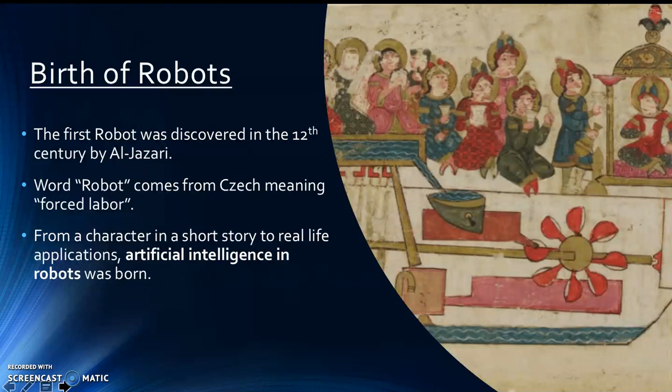These robots became more and more sophisticated so that they can run the full automation of factories. In this technologically advanced era, every operation in an advanced factory, from the very starting point of the product design till the assembly and inspection, is controlled by intelligent systems consisting of computers and industrial robots.

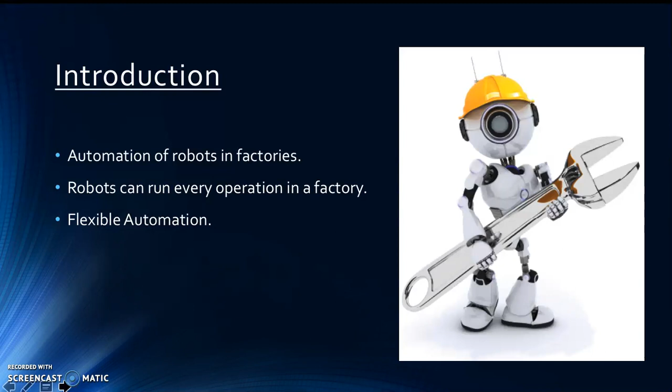An important keyword in this transformation is flexibility. Robotics became more and more flexible due to the progress in computer technology and programming techniques.

Open manufacturing. Advanced robotics are used in many industries to accelerate manufacturing processes such as transporting and handling of materials, welding, dispensing, and many more technical tasks. Automation is a branch of open manufacturing which decreases operating costs, increasing efficiency and quality of work in a factory.

More modern companies engage in open manufacturing, which is a modernized method of production where products are created in an open, collaborative, and distributive manner. This allows for a broader design scope and product capability, which in turn adds value to products.

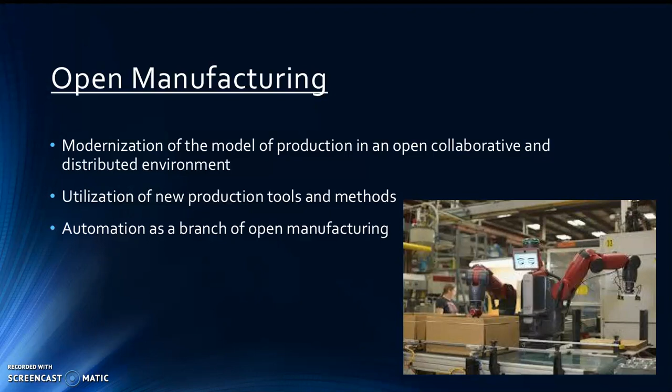Open manufacturing utilizes new production tools, methods, and networking techniques to make the production process more engaging and open to modern manipulations. The demand for a permanent change in production lines of industrial robot makes industrial automation desirable.

Flexible automations of industrial robots enables them to adapt to different tasks while decreasing the time needed for product manufacturing while maintaining a high quality of work.

An example of a state-of-the-art flexible automation production line is the Tesla Motors factory in Fremont, California. Robots have essentially replaced the need for human intervention and can perform generalized as well as specialized tasks.

The key feature of flexible automation is that by being able to adapt and retask whenever necessary, it makes it possible to keep production costs at a fixed rate, whether a small batch or a large quantity of parts are being produced.

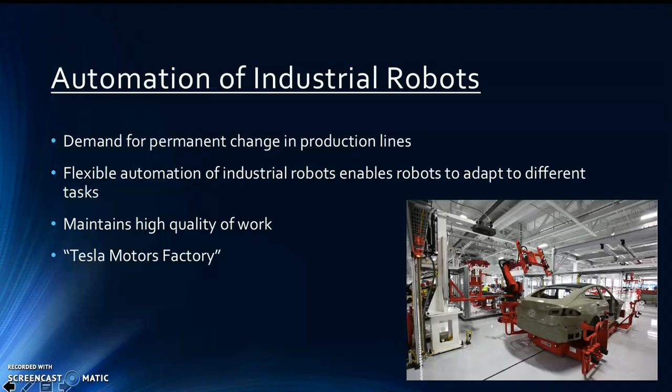Artificial intelligence is commonly attributed to intelligence displayed by man-made machines. With artificial intelligence being implemented into robotics, a new generation of control machine that is able to operate either autonomously or with human supervision is created.

Previously, robots were programmed to perform a certain task or set number of tasks. However, with the interconnection between mechanical, electrical, and computational requirements for modern machines, it is possible to create robots that are able to receive stimulation from external sensors and make decisions based on learning and reasoning algorithms.

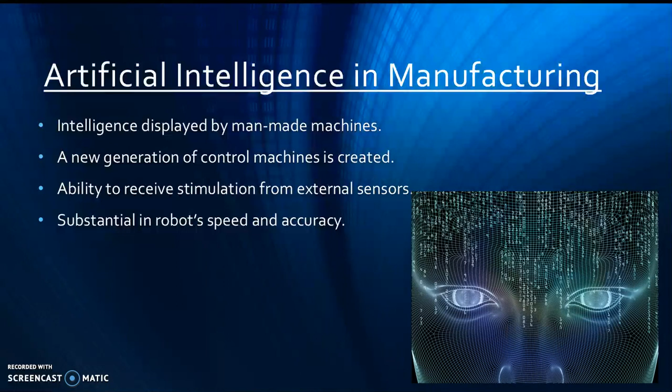With certain developments, robots' speed and accuracy have improved substantially.

State of the art. Artificial intelligence in the industrial workplace is improving at an unprecedented rate. The robots in factories can not only perform several complex tasks using a combination of small tasks, but they can perform these tasks with utmost agility.

This means mimicking the human ways of performing the task. The improvements to artificial intelligence in the robotic industry has gone hand in hand with the improvements in the realistic human-like operation of the robots, which results in tasks being performed in the best possible way of performance.

Artificial intelligence robot can make decisions. When a machine operator analyzes a part and notices a defect, the operator tends to physically pull it out of the production line and have it replaced or start over in the production line, depending on the situation.

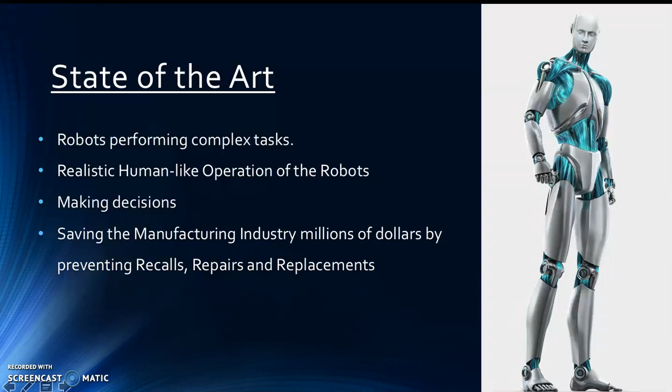Instead, artificial intelligent robots can perform several checks and maneuver its way through to get the defected part out of the production line. It is key to note that when artificial intelligence is used, the probability of error is decreased, saving the manufacturing industry millions of dollars by preventing recalls, repairs, and replacements.

The future of manufacturing industry relies heavily on robots. Journalists have gone as far as naming it the fourth industrial revolution, where entire factories are controlled by artificial intelligence. This means that starting from raw material line to packaged product, there will be little to no human involvement.

What if a custom-made product is required by the factory? For instance, a jet rocket fuselage system is damaged and needs to be manufactured. The factory would be connected to the outside world using Wi-Fi and Li-Fi. This would result in customers placing a custom order in the morning, and same day in the evening their order would be ready to be shipped.

Manufacturing wonders like this are currently happening, but we are yet to see several advancements due to complete autonomy of the systems.

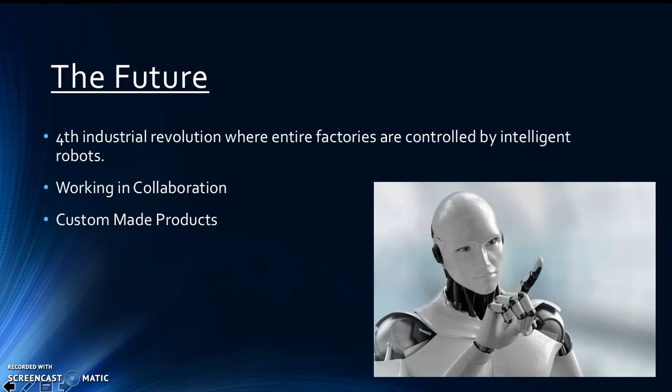Surgical robotics. The surgical robotics field was developed under the basis that surgery requires high accuracy and repetitive tasks can be achieved. The Da Vinci surgical system is a master-slave procedure where the surgeon's hands, wrist, and finger movements are translated into the console movement controls.

The surgeon was able to complete his surgeries while operating a console, viewing a 3D image of the surgical field.

With the emergence of a new field, the problem is always about funding and which skills are needed to further develop the studied area. The surgical robotics field represents a great example where engineers, scientists, and clinicians need to be working together. Advancing such devices in operating rooms requires an engineering approach.

Existing surgical robotic systems are multi-million-dollar systems, but they have been commercially successful. The future of surgical robotics looks brilliant, especially if the cost becomes lower. Biological, creative, and inspired devices are required to further develop this field.

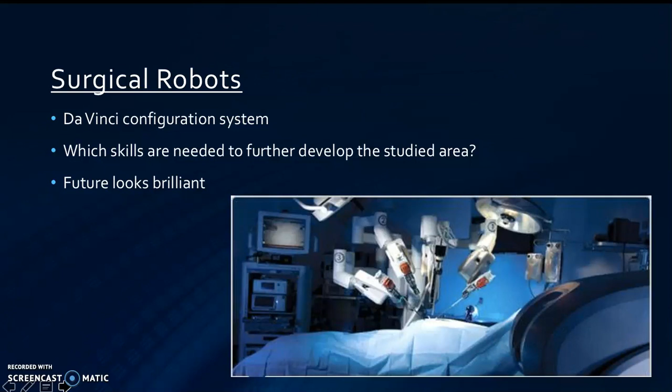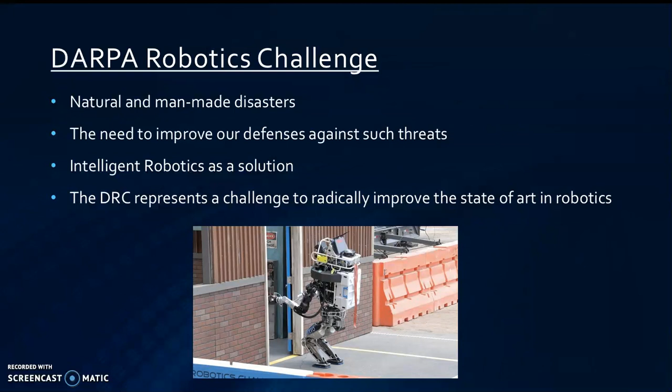Problems are more than just technical issues. How would the robots be able to communicate with the humans? The DRC represents a challenge to radically improve the state of the art in robotics, and the goal is to have a robotic system that could have assisted during the disaster at Fukushima Daiichi.

Evidently, the technology developed into robotics exceeds lots of abilities found in humans. Therefore, the problem in creating human behavior is not just about technology. We ask, why is it so hard to create human behavior? Cognition and intelligence might be the good missing parts, but there's still something unclear in the overall picture.

The solution will be merging all the information gathered and finding the right way to implement it. If research continues to be done separately, the advancement will still be slow and the progress will be limited. A complete and sophisticated system is the real challenge in the robotic field.

Robotics has progressed not only to look or behave like human beings, but they are able to do what humans can do in a more efficient way. Artificial intelligence is the next big thing in robotics. Finally, when human capabilities such as cognition and intelligence can be integrated into robotics, more advancement will happen and a new era in robotic systems will occur.